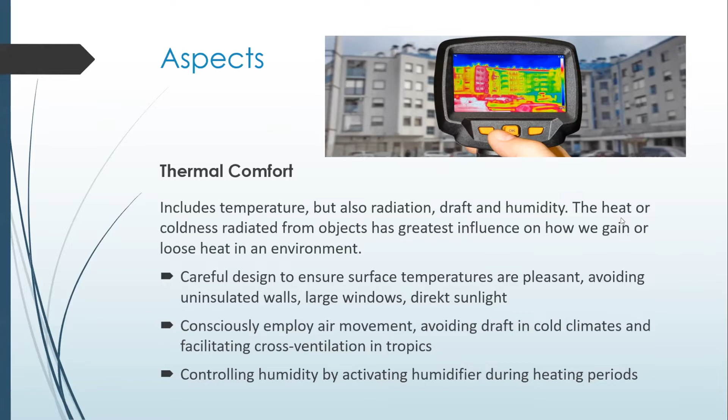Another point that is very relevant for wellness is noise. Many studies have proven the harmful effect of noise, but what complicates the matter is that it is a very subjective sensation. If you think about the sound of playing children, parents, grandparents, and children themselves usually find this a tremendously joyful sound, whereas not everybody will join that perception. Some people love the sound of revving sports cars, others prefer the sound of a bicycle bell. So noise, one person's noise is not necessarily everybody's noise.

So when we employ sound design, we do something we've learned from concert halls and similar environments: consciously use sound-absorbing materials just to keep the noise level down, which is universally accepted. Too much sound very quickly turns the perception into noise.

The other approach is to facilitate a choice of noise. What we mean by that is it must be possible for tenants, for people using offices, to consciously choose which level of sound, which level of noise, they want to be exposed to. That includes simple interventions like soundproof apartment doors or the availability of quiet workspaces, and of course, on the building level, the distribution of functions according to noise tolerance.

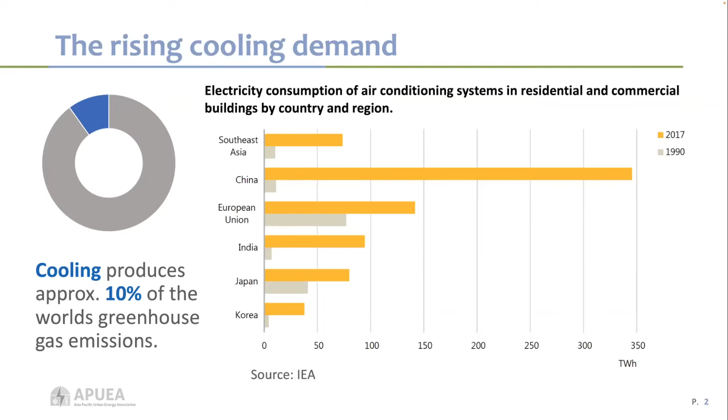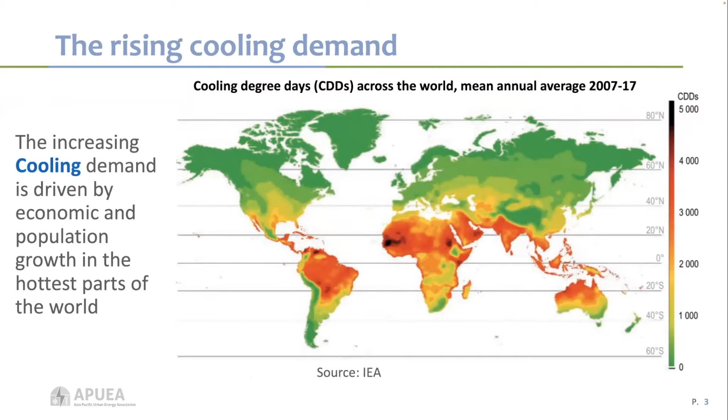The increasing cooling demand is driven by economic and population growth in the hottest parts of the world. As you can see on this map, the more red marked, the more cooling degree days, or the higher cooling demand, or the hotter climate those areas have.

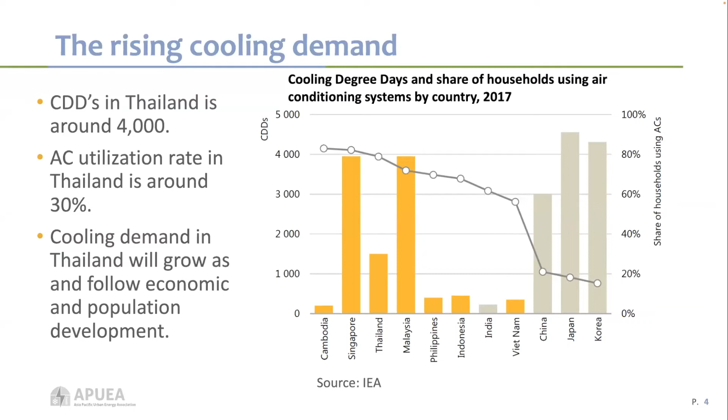I just want to mention a little bit about cities. Cities occupy only 2% of the world's landmass, but they consume over two-thirds of the world's energy, and account for more than 70% of global CO2 emissions. So when we address energy consumption, mitigating climate change, and reducing carbon emissions, we really have to work towards cities.

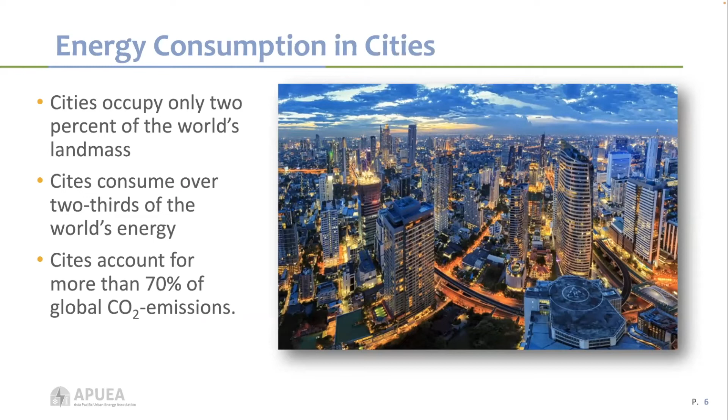And of course, we still have an ongoing trend, the urbanization trend. Today, about 60% of the world's population live in cities, and this number is expected to grow to around 70% by 2050.

This trend has also led to the growth of megacities, basically large metropolitan areas with a population of more than 10 million people. Today there are 33 megacities globally, 17 of those in the Asia Pacific. By 2030, it's expected to be 43 megacities globally, and 25 in the Asia Pacific.

Energy consumption in buildings: buildings account for about 30% of the final energy consumption in the Asia Pacific region, and they also account for a large part of greenhouse gas emissions in cities. In Hong Kong it's about 60%, in New York 70%, Tokyo 40% for commercial buildings.

Space cooling is really the fastest growing use of energy in buildings, and accounted for 18.5% of the total electricity used in buildings, which is quite a big difference from 13%, which was the case in 1990.

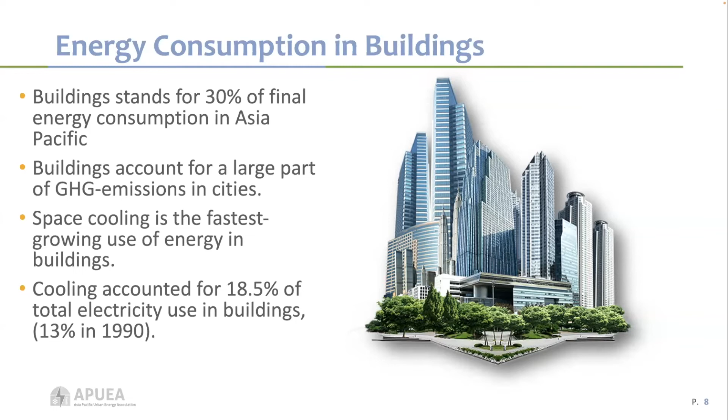So one way to cool down buildings in areas where you have high energy demand and high energy density, which occurs in cities, especially larger cities, is district cooling systems. These are centralized cooling systems that supply chilled water or cooling to more than one building. So you have a centralized production plant producing chilled water and supplying buildings through a pipeline. There will be no air-conditioning units or chillers inside the buildings, only heat exchangers to transfer the energy to the apartments, office buildings, shopping malls, or whatever kind of building it is. There are several benefits with these kinds of systems.

District cooling systems are up to 50% more efficient than conventional cooling systems. This is possible because you're able to really maximize temperature control, distribution, and heat exchanging of energy in the buildings. You have personnel operating the system 24/7, and there are also maintenance plans looking after the system to keep the high efficiency for a long period of time.

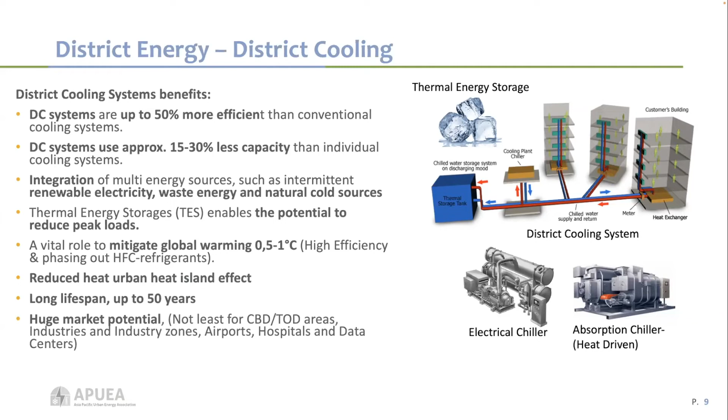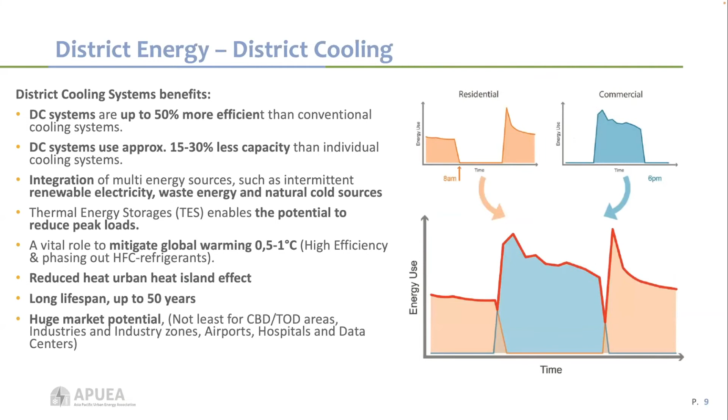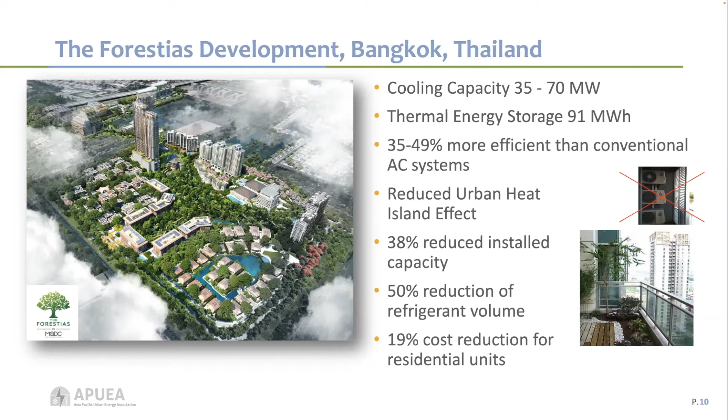It will have 38% reduced installed capacity, 50% reduction of refrigerant volume, and the cost for residential units is expected to be reduced by about 20%.

This is how it will look from above. You see how the piping system is—they will utilize utility tunnels to have the pipelines that go from the chiller plant to the buildings.

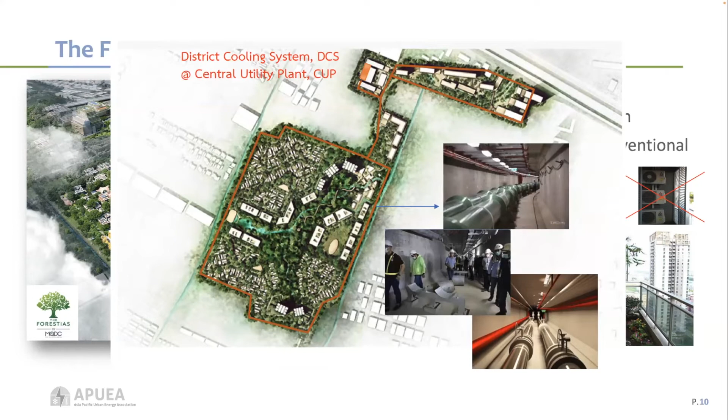Another project is the One Bangkok Project, which is Thailand's largest fully integrated district. It's a very large development, consisting of 16 buildings, including offices, hotels, shopping malls, and residential buildings. It has a high focus on sustainability. It's a LEED certified building, and it will have a district cooling system that was chosen because it's the most efficient way to produce chilled water for the area.

It also will use recycled wastewater as makeup water to the cooling towers. So that's another way of integrating waste energy and wastewater to benefit—integrating energy and an environmental system together.

We like to mention this project because it's a typical example of how you can use urban planning. When you plan new development in a city, you really want to optimize energy consumption, reduce environmental impact, and create the best environment for the residents in that area. This is a good example, but it's also easy because it's one project, one development, one land with one owner, so they can really optimize everything, which is much more difficult if you have different owners. Urban planning is very important for developing sustainable cities, and this is a good example.

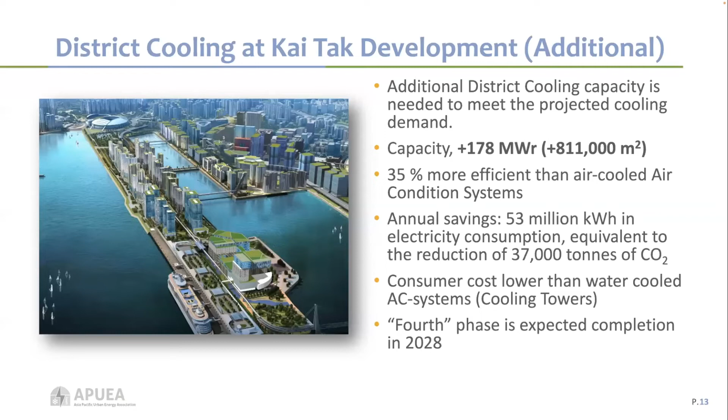Another phase has been added to this project—another 178 megawatts have been added to a fourth phase.

Okay, I'm running out of time, so I will summarize. Cooling produces about 10% of the world's greenhouse gas emissions, and it's the fastest growing use for energy in buildings, already standing for 30% of final energy consumption in the Asia Pacific.

Now we have a trend where governments are pledging to be carbon neutral by 2050. So there's more and more focus on energy efficiency, integrating more renewable energy, and that will only increase. Thailand will be carbon neutral in 2050, so they will increase the focus on energy efficiency and renewable energy. Green buildings and building certification are also getting more popular, and that's another way to integrate district cooling as a very energy efficient system.

Just to end my presentation, I will say that district cooling systems can increase value to the buildings, increase the lifespan of the buildings, and give financial and environmental benefits for people. Thank you, that was my presentation. You have my contact details there. Let me know if you have any questions.

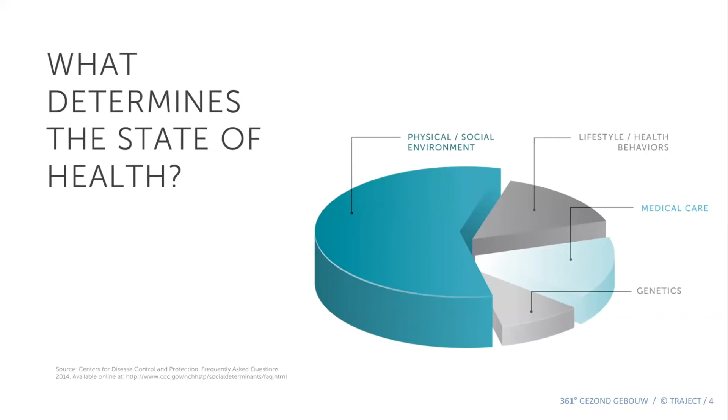But for about 12%, it's influenced by access to medical care, which is quite an important factor. But almost the same size of influence is determined by lifestyle and healthy behavior - how the human being acts within buildings or outside the building, that's the behavior part. And the biggest influence that determines the state of health is the physical and the social environment.

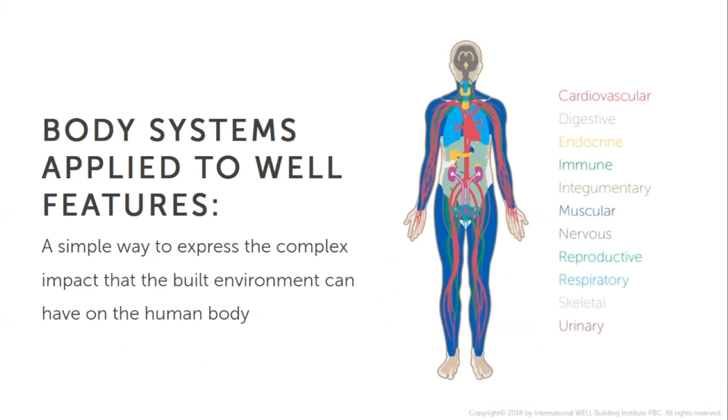So what the WELL Building Standard does is determine how to impact health, well-being, and productivity in buildings. They took a look at the human being - what physical systems are influenced and what the human being is made of. We have recognized several physical systems, and the building standard has peeled those physical systems off and translated them into several categories, which they call concepts. The building standard consists of 10 of these concepts.

It's nourishment, water - well, we have seen a few details already in the presentation of Holger. And the building standard calls them features, and some of them are required.

They don't earn points, and some are optimizations, which could actually deliver a product point, and the amount of points determines the certification level - bronze, silver, gold, or platinum. That varies obviously for each project, and that's in fact the construction of the building standard as a rating system to certify a building.

But if you take a look at the investment and how the investments relate to the building standard, we have seen in the previous presentations a discussion about energy optimization or operational cost optimization. But if you take a look at the cost of salary and benefits of staffing, then we're talking about these ratios. I won't say it's not important, but if we talk about return on investment, reduction, and optimization of productivity and health and well-being, there's much more influence available.

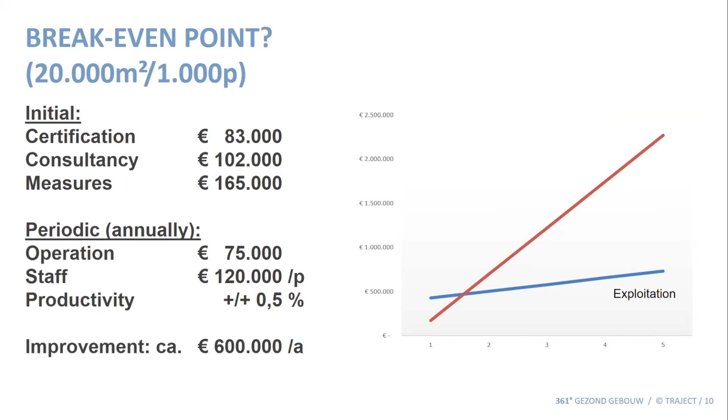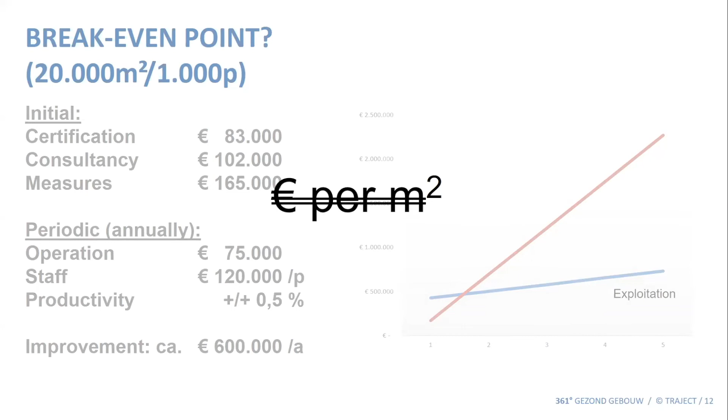As technicians, we are often used to talking about euros per square meter when it comes to investment in certification cost or implementation of technical measures like lighting or ventilation. We translate the cost towards the floor area. But we should get rid of that way of thinking. We should start thinking about investment per building occupant and how the occupant is going to behave - that's the relation to productivity.

So a few details, a few examples. We discussed with the catering company how to improve the quality of food - biological food, less fat, more fruit, and also the sizing of the plates and stuff like that. We established attractive staircases, with motivating images on the walls and aesthetically pleasing lighting. We also explained how building occupants, the staffing, could choose to take a healthy walk to the outside environment to find nature during their break times. So we established many other things.

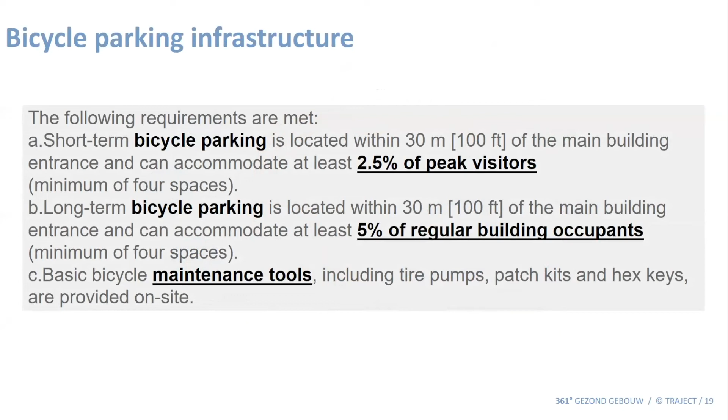So let me explain a bit about the Netherlands and bicycles. We have a strange relationship with bicycles - we have more bicycle tracks in the Netherlands than any other country worldwide, and we have more bicycles than people. So it's a bit strange that a US-based standard demands a certain way to stimulate bicycle use, especially when it comes to bicycle storage.

Now back to the happy building of the VGZ, the insurance company. Let me enlighten a bit about the concept of light. This is the original situation, the existing building, and we changed it towards a more attractive and improved lighting situation. To improve the lighting quality, many factors are being influenced, whether it's the color temperature, or more technical details like the lux level, the flicker rate, the position and the contrast.

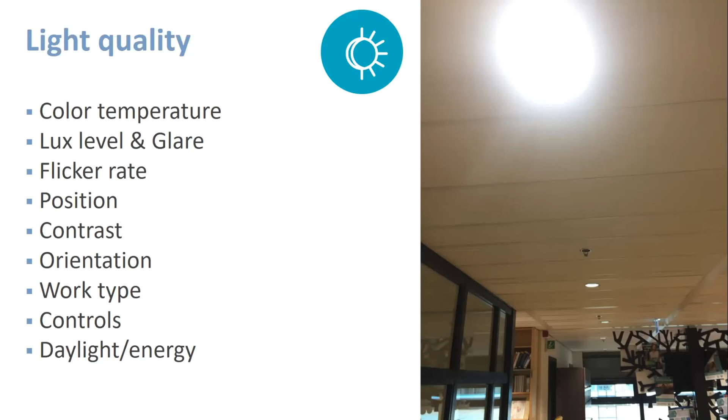It also influences the type of work being done at certain locations, or the controls which enable occupants to influence the type and quality of lighting. And it also obviously depends on the amount of daylight entering the floor area. So we ended up with a new lighting plan, which resulted in, in this example, a lot more lux level than the previous situation.

So that's a good starting point. But we looked also into all those other details, and we ended up with a retrofit situation, because the technical equipment in the building itself limited the amount of light fixtures being extended.

But to establish an improvement like this, we had to hire and get in contact with the light consultant, but also the light engineer, the interior architect, and the facility management staff, obviously the owner, because someone has to pay for it.

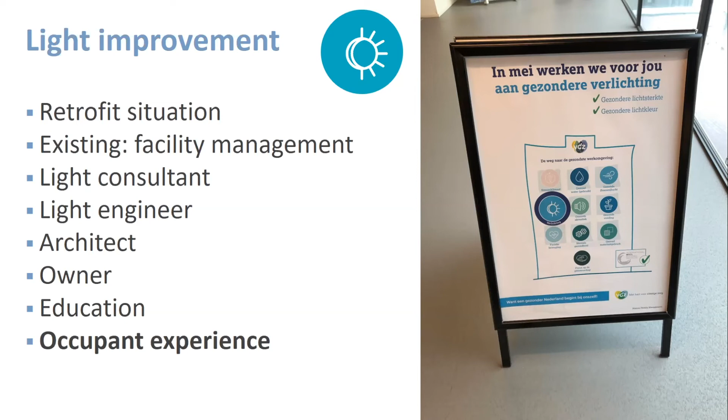And the most important part is regarding the acceptance of the occupants. So we spent a lot of time on educational materials to inform the occupants about the improvements being made in the office, but also how to cope with this type of improvement.

Regarding the lighting fixtures, we created a mock-up that informed the occupant about the circadian daylight rhythm, and also how the new lighting situation is able to support the circadian rhythm of the building occupant. So there was an improvement in lighting quality, but also in the influence on the circadian rhythm of the building occupant. And that's quite important because that's explained within the WELL building standard.

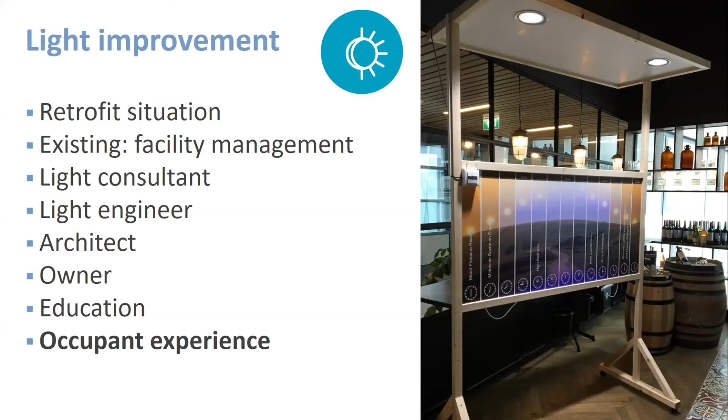The circadian rhythm influences the day and nighttime rhythm. So if the amount of sleep and the quality of sleep can be influenced by better light during the day, then a lot of productivity improvement can be expected, because people sleep better and remain more productive during the day.

So that's one example of one of the concepts addressed by the WELL building standard. Put it in short, the WELL building standard is all focused on occupant health and well-being through the 10 concepts. I explained a bit about the financial impact, the investment in occupants. Those investments will be paid back within 2 years, even including the certification cost, which could be experienced as quite high. But when we relate them to the increase of productivity, it will be paid back within 2 years.

And I also explained the WELL building standard, which could be used as an instrument, as an engagement tool, to convince other people, whether it's an investor, an owner, the facility management staff, or most importantly, the building occupant. A standard and structure like this leverages the importance and can very possibly be used as an engagement tool.

So when we talk about a certain amount of features, those features provide a lot of background information to establish improvements. So whether you're certifying the building or not, just take a look at the WELL building standard, and a lot of improvement opportunities are explained. What we need to learn to do is find those opportunities and apply those improvements. So that's about it. This is my presentation.